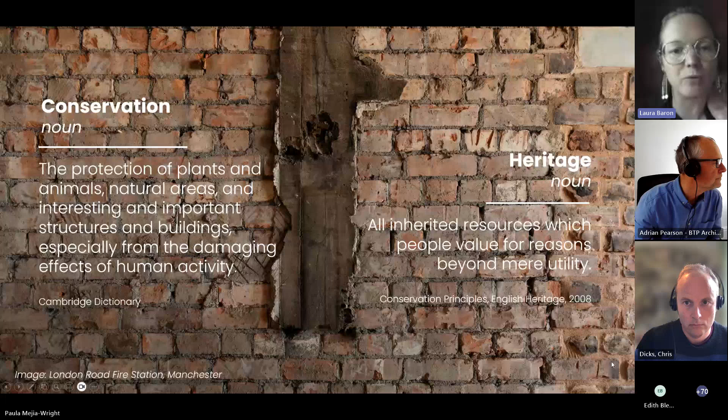So the term heritage is defined as all inherited resources which people value for reasons beyond mere utility. So we place values on our built heritage that go beyond cost per square metre, and we impose protections through listings and other restrictions because we value their historic and social significance. The conservation of our built heritage is sometimes seen as a barrier to change and progress, especially when we're talking about retrofitting energy efficiency measures.

But the definition of conservation is the protection of plants and animals, natural areas, and interesting and important structures and buildings, especially from the damaging effects of human activity. So conservation in all its forms is about the responsible stewardship of our inherited world, and with that it's intrinsically linked to supporting planetary health and conserving our natural resources.

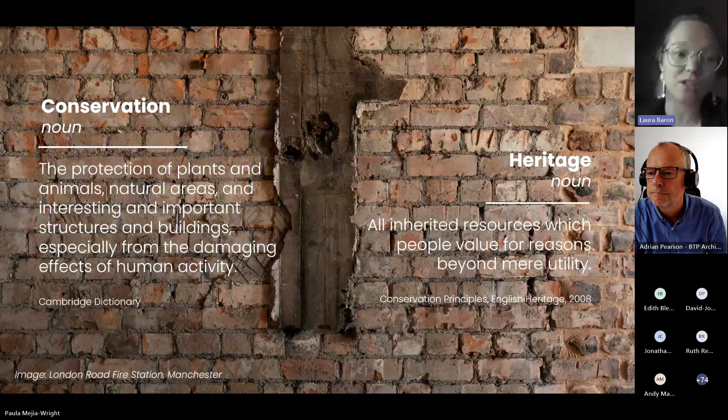But despite this inherent alignment, sorry about that. Something else was starting in the background. Is everybody muted? Just thanks.

We can't pretend that it's not without challenges. We of course need to be mindful of the sensitivities that come with listed and historic buildings, but that doesn't mean we can't be ambitious with our historic built environment, even radical sometimes.

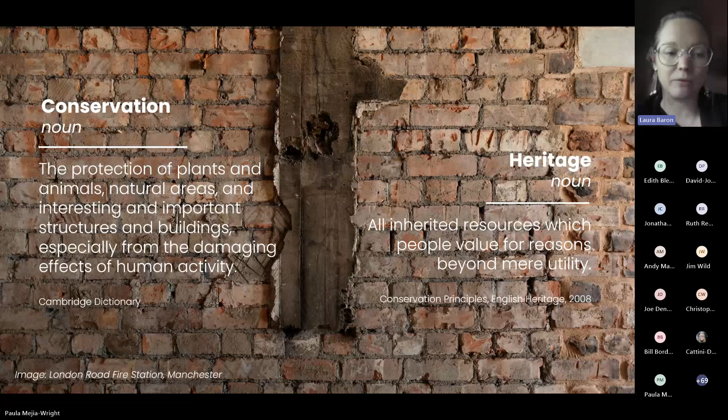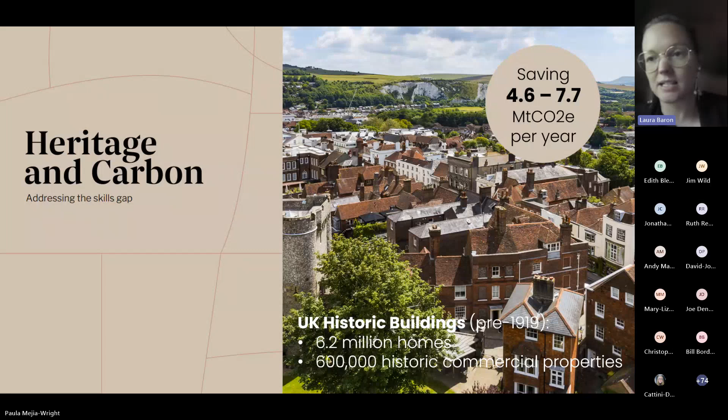Next slide, please. There's a report published in 2023 that highlighted the heritage and carbon skills gap and noted that nearly a quarter of all UK homes and a third of all commercial buildings were built before 1919. And that report estimates that retrofitting these buildings would equate to around 30% of the annual reductions in emissions needed to meet the sixth carbon budget. So doing nothing with our historic buildings is not an option, and doing something requires a collective effort and a shift in attitude. Next slide.

So retrofit is a word that we now all associate to mean buildings that are adapted to improve their energy efficiency with a view to reducing carbon emissions. In fabric terms, that's replacing windows, adding insulation, improving air tightness. But the problem with doing this in a building built before 1919, if you go back to the previous slide, sorry, Paula, is that these traditionally constructed buildings perform very differently to modern buildings, especially in relation to moisture and air movement.

They're made of vapor permeable materials which take up moisture from their surroundings and release it according to the environmental conditions. So drafty old buildings may not be very good at keeping in the heat, but this uncontrolled background ventilation helps reduce moisture accumulation. So when you apply layers of vapor impermeable materials like plastic-based insulations or cement renders and reduce that flow of ventilation too much, it can lead to problems of moisture accumulation and cause damage to the existing fabric, cause mold, and lead to poor indoor air quality.

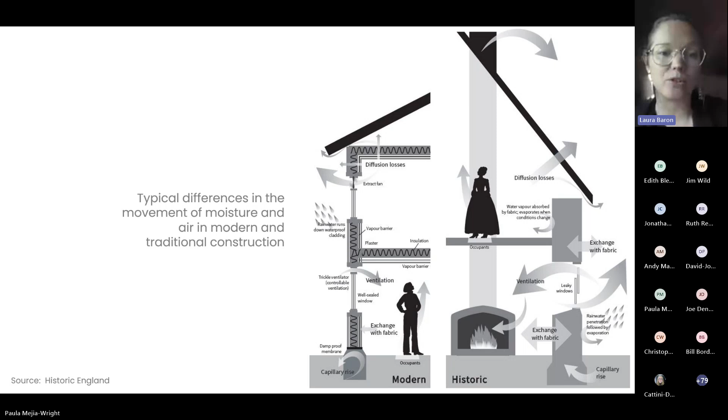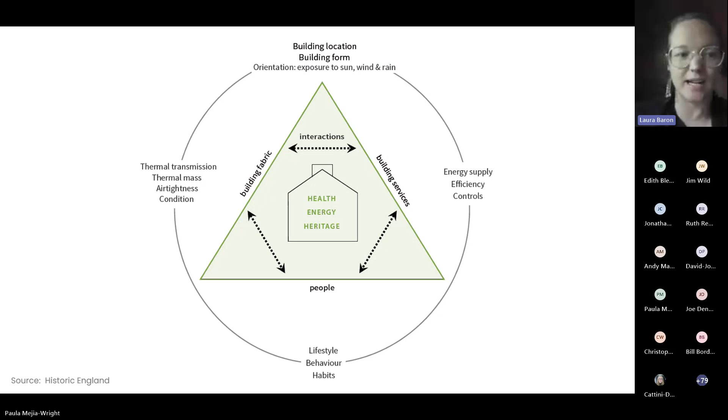It's important to understand how a building is functioning as an environmental system, and that understanding feeds into what is called a whole building approach, one which considers the building as a system of interconnected materials, functions and users, and understands the effect of external and contextual influences. This is the right approach to retrofit, regardless of the age of your building and whether or not it's listed.

At Purcell, we've been working with the City of London Corporation for over the last 2 years to help understand the barriers to action across the heritage buildings in the square mile. The square mile is home to over 600 listed buildings, which cover about 20% of their total land area. The City Corporation has ambitions to get to net zero by 2040 across the city, so they recognise that this isn't an area they can ignore.

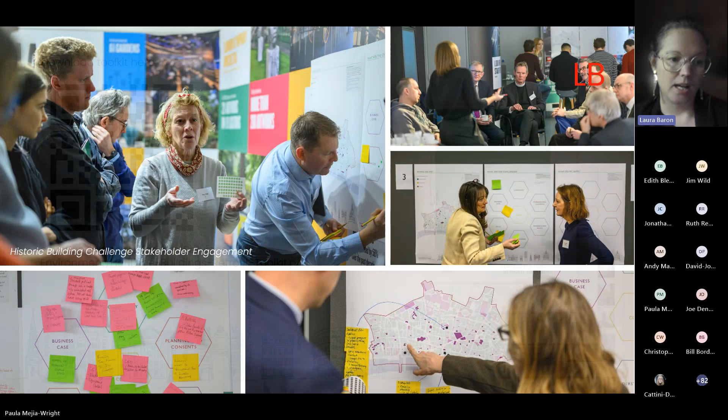We've carried out extensive stakeholder engagement with owners and occupiers of listed buildings to try and build a picture of what it is that is needed to help facilitate greater action in relation to carbon reduction across the built heritage. So in response to the feedback that we collected, we've produced a toolkit which is available to download as a PDF.

There is a QR code on the screen for those who want to take a look. If that's not working, you can just type Heritage Building Retrofit Toolkit into Google and hopefully it's the first thing that comes up. The goal of this was to provide easily accessible advice and guidance on where to start and to signpost other excellent resources on the topic.

The toolkit identifies 8 core typologies of historic and listed buildings common to the square mile, but with relevance outside of the city too. It acknowledges that there's no one-size-fits-all solution when it comes to heritage retrofit, but there is a common approach. We've set out a 9-step approach, which is based on best practice principles.

And this understanding helps to develop the options of how you can improve that, but also build a case for change in terms of significance.

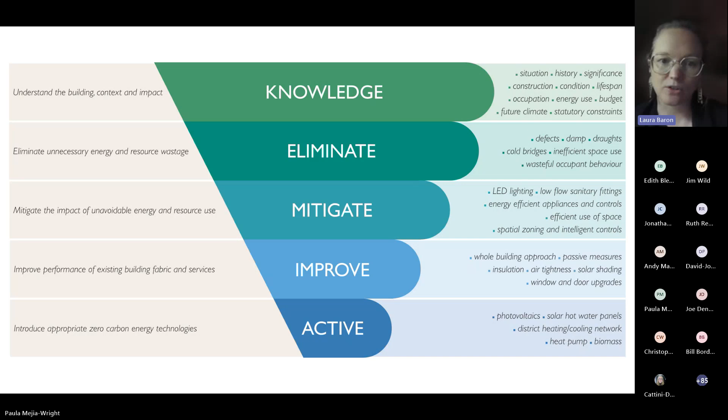This is very much an approach that we took at St John's College in Cambridge, which I'm now going to hand over to Paula to talk about in more detail.

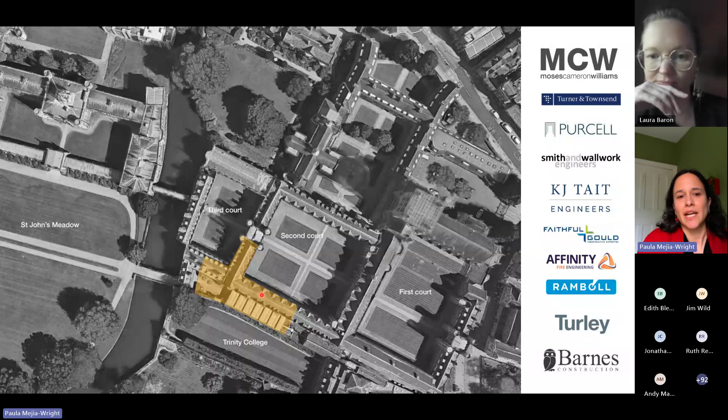So we have a corner of second court and also a section of third court, which was part of the site. We also have the Buttery Dining Room, the original one from the 1970s, which was built in an infill, which was the original kitchen lane where they kept all the stores. It also included a terrace. It's a very small terrace, but it's quite significant because it's the only outdoor space where people can sit in the college within the core, historic core of the campus.

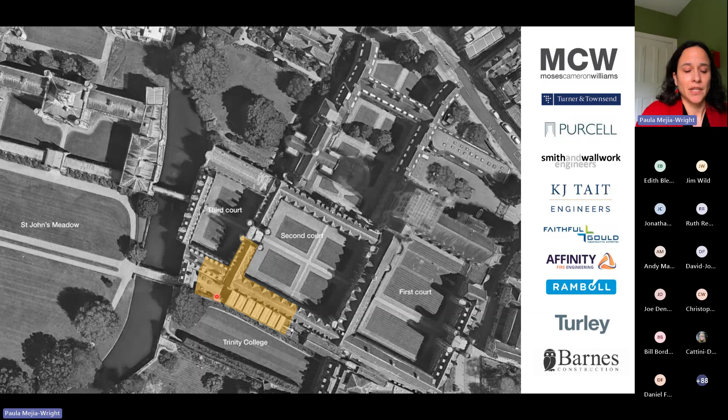This is just a picture of what the second court side looks like. So we are exactly here in the corner. And just a little bit about what it entails.

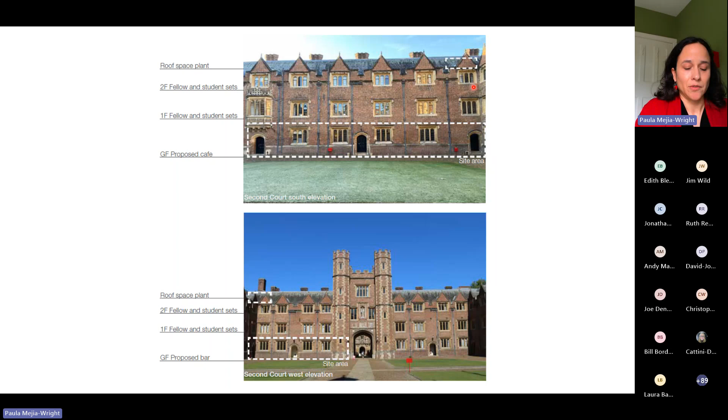The part of the listed building that we are going to talk about today was limited to the ground floor, but we also have some area in the roof where we're going to have all the plant, and Dan is going to tell you about it. We have to thread all the services from the roof to the ground floor through the listed fabric, so that's quite a tricky part of the project.

The original layout had 3 very distinctive spaces: the dining room, built in the 1970s, and a bar, which was a little bit dated but really well loved by students and the fellows. A section of the community felt it was not very inclusive - it was pretty much a sports bar with doors.

All 3 spaces had doors to the center hallway where the toilets were, and the JCR, the junior combination room, which was basically the undergraduates' social space. That space had an internal ramp which used to take most of the space in the plant. It was quite intrusive, and also for somebody to use that ramp they needed to call a porter to open the door, so it was not a very great condition.

The Buttery dining room, built in the 70s, was not insulated. It was cold, acoustics were poor, and it was very dense - a little bit like a school canteen. It needed some revamping, so that's part of what we were asked to do.

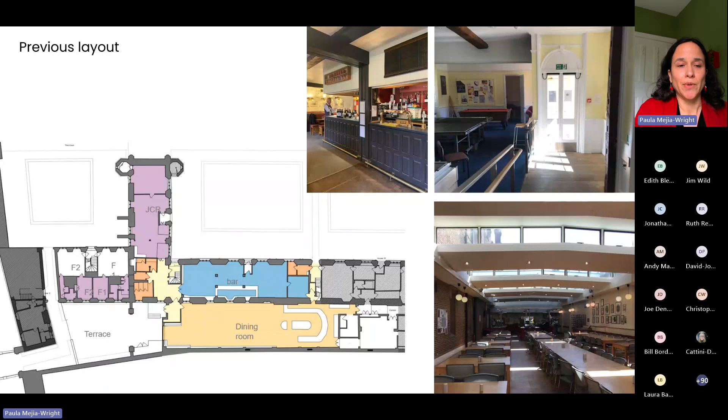For the proposed layout and the brief, the college asked us to create a space that was going to be the center of the community. This was the first project of the master plan - they had a master plan done by Allies and Morrison, I think in 2018, and this was the first project.

They needed to be more inclusive and accessible. We needed to increase the capacity of the Buttery as well, because they wanted to have at least 200 seats, and they only had just over 100. And it needed to be more sustainable, and we'll get to that.

In terms of inclusivity and accessibility, we raised the level of all of the JCR and created new levels on the outside, on the court, so we can access the community hub from level access from the court. We added a ramp, and we also raised the terrace, so basically we have a single level all throughout.

We moved the bar from this area to the JCR section and opened up what was originally windows - you can see one here in the corner. Original windows became doors, so we could connect both spaces, and that was our strategy to increase the capacity of the space, because there was no way we could really extend any more into the terrace of the original Buttery.

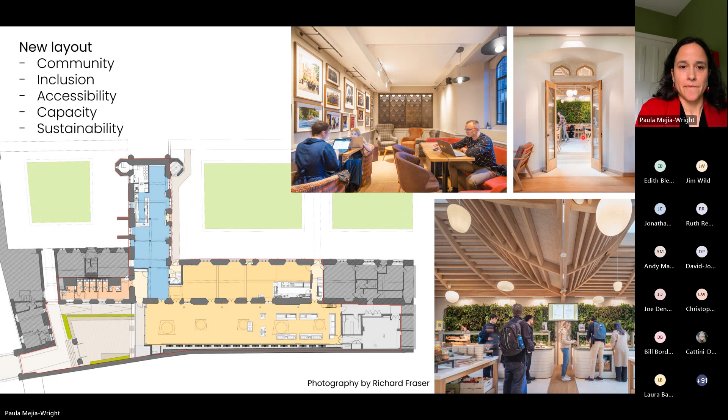Hopefully that gives a picture of the kind of level of intervention that was possible, and I think that was primarily because we'd built up quite a strong knowledge base and really understood the capacity for change.

Purcell were Heritage Architects, so we carried out a large amount of research, particularly into the historic development of the college, specifically this area - looking at archive records and historic drawings. There was opening up works and visual inspections carried out.

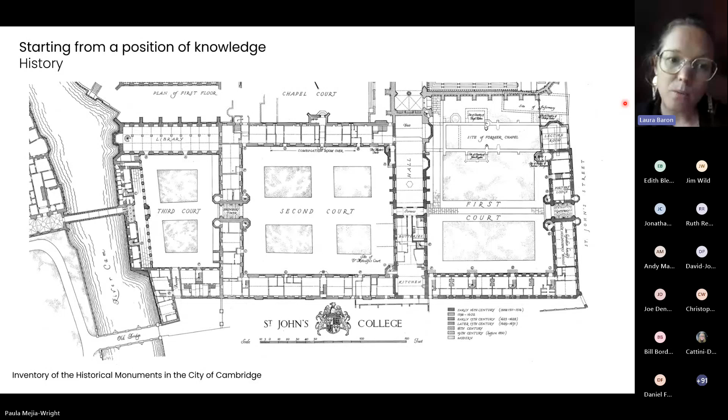Of particular note, there was a survey of the interior panelling that identified areas clearly historic, other areas that appeared historic but had been reused from somewhere else. It highlighted that quite a lot of the panelling was more modern, and this helped build a case for change and provide demonstrable evidence for what we decided to do as part of the retrofit of the heritage building, which was to insulate the inside face of the external walls. We're going to come on to that in more detail.

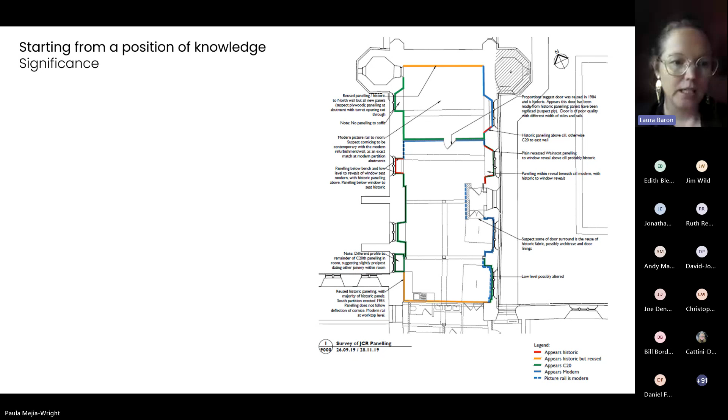So all of this information fed into an assessment of the significance of the building, which is graphically captured through this drawing, and there were other subsequent ones as well. It shows areas of high significance in orange and red, medium significance in yellow, like the ground floor slab area, and low significance in green and blue, like that 70s extension that Paula already mentioned.

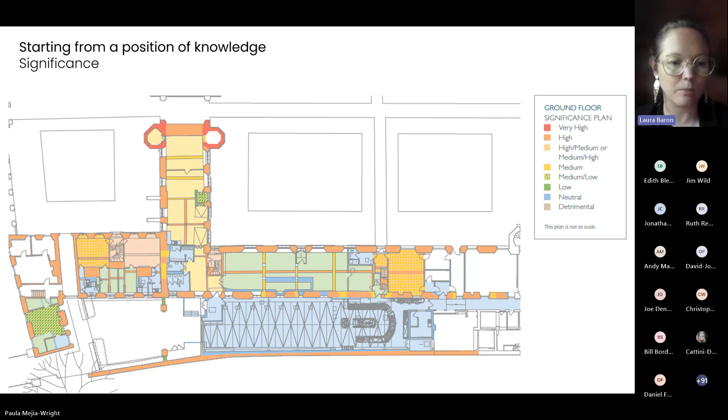So the study concluded that whilst the project is within a highly significant building, the area allocated for this renovation has undergone considerable change in terms of layout, use and built fabric. Like most listed buildings, the site has capacity for further change to meet contemporary requirements, including environmental improvements, provided that they don't adversely impact the most significant spaces.

So in addition to all of that collection of data around the significance, there was a lot of research to determine the building's performance, including condition survey and opening up works to verify the construction build-ups.

This image shows the thermal imaging survey that was done to understand where heat was escaping from the internal areas. The survey showed evidence of air leakage caused by openable elements of the windows and doors that do not form a complete airtight seal. You can see that through the different variations in colour there.

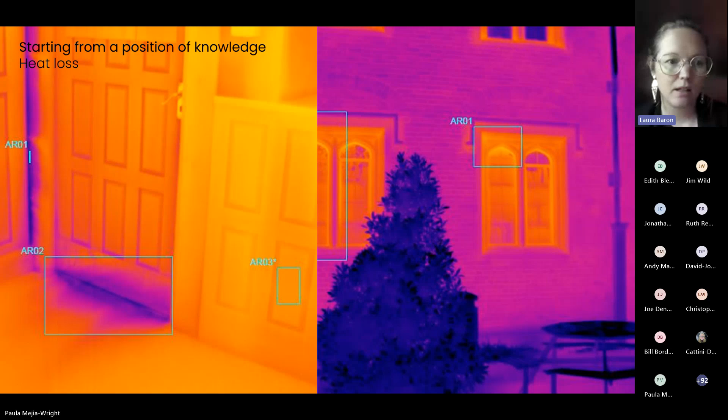And quite a prolonged period of monitoring of relative humidity, ambient temperature and surface temperature over a 12-month period before works commenced, and that was to review the possible environmental impact of the proposed changes on the conservation of the historic fabric and furnishings.

So there was a huge amount of baseline data and research that was built up, and that fed into the analysis that K J Tait carried out, which I'm going to hand over to Muhammad now, on the next slide. Before I pass on to Muhammad, I should have told you before that the reason why we did all this data...

So the surveys, the analysis of the historic fabric and all of these is because in terms of sustainability, the college didn't give us a very detailed brief. They just said they want the building to be as sustainable as possible. Initially, as a team, we only thought we could just think about decarbonisation. We didn't really think we could have any improvements to the fabric, being a grade 1 listed building.

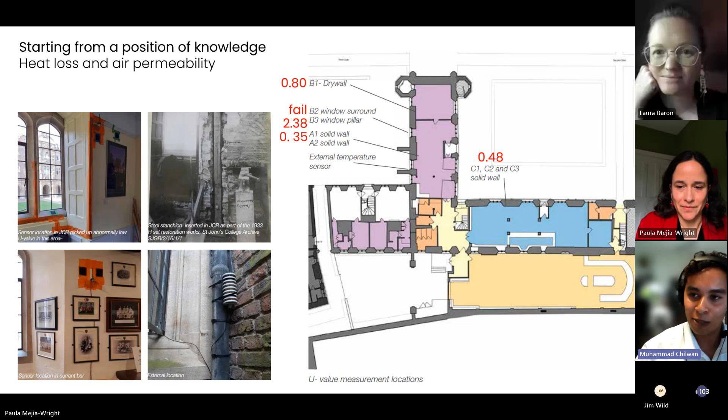So I'll pass on to Muhammad, so he's going to talk about the model. Thank you very much, both. So my name is Muhammad, I'm from K J Tait. I was working on the energy modelling and helping out on the BREEAM assessment for St John's.

So what we did is we gathered the information from the surveys, and with the use of the architectural plans and elevations, I managed to create a 3D model of the refurbished areas. And in this case, this is used as a base case to compare against any sort of proposed upgrades for the future.

The building elements assigned for the U-values were coming from the survey, but we also used assumed values as well, from other experience we have with other buildings and investigations. So if you see on the left, we've got the U-values that were assumed and from the surveys there.

It should be noted that these U-values are only indicative due to the historic nature of the building. The calculations used to determine current and future performance were developed for modern structures with known materials or predictable performance. Applying these tools to historic buildings can be done with a general understanding of current performance and anticipated change, but there are many variables which mean outcomes can differ from those calculated. Nevertheless, when used with understanding, the tools can still be helpful in defining the overall impact of changes.

For the model, we used a test reference year weather file to calculate weather conditions and provide the annual heating output, seen on the right-hand table. Using a daily profile between 9 AM and 10 PM and a set point of 21 degrees, a peak zone heating consumption and an annual heating energy consumption were calculated by the software.

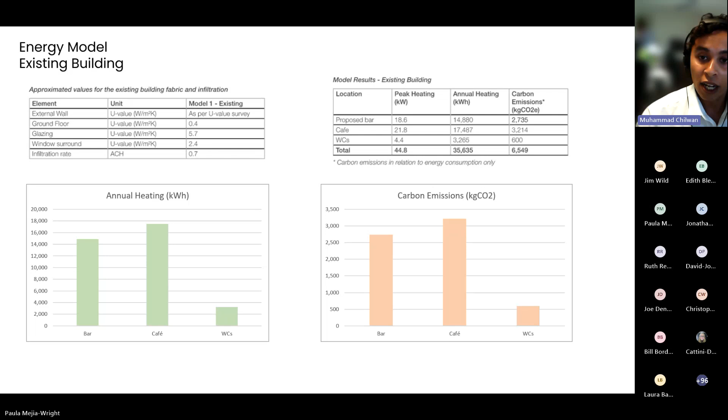We used quite a variety of different separate models to compare against a base case. Six options were created using the IES software to assess the potential reduction in annual heating loads, energy consumption, and associated carbon emissions.

As displayed in the table, we used different options, replacing the glazing to provide a better thermally insulated performing option. We also used options to insulate and improve the facade, with the aim of a better thermally insulating envelope, and even a combination of all separate variables.

As a team, we investigated as many feasible routes as possible to obtain the best course of action to provide the best reduction in terms of annual energy consumption.

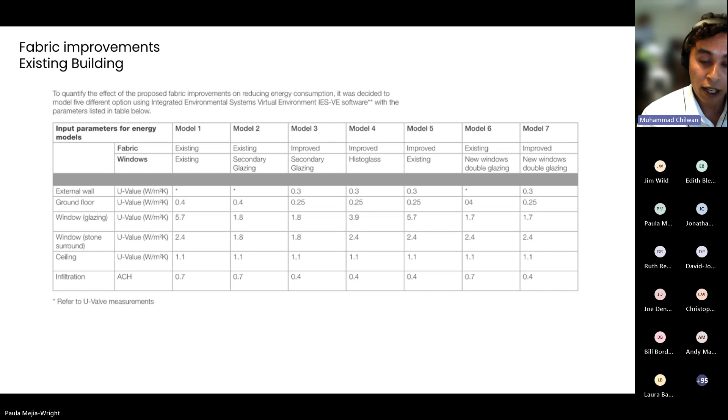Given the heritage of the building, there are limitations on how much can be altered and changed.

To further narrow down the best practical way of reducing energy demands, various glazing options were looked into. These can have thermally improving aspects, but there are also other considerations, like visual appearance and maintenance. Replacing a whole window system also has to be kept in line with aesthetics, so this was a parameter we looked into when choosing the best approach.

Secondary glazing was an option we looked into, which helped with the overall U-value of the glazing system, but created a negative impact on the view out and the daylighting, which in turn did not help with achieving certain BREEAM credits.

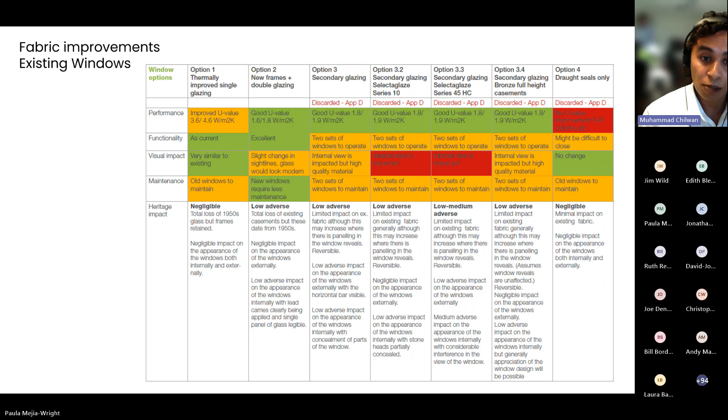This was closely followed by options 4 and 7. It was seen that the impact of window replacement was less than the improvement of the fabric, primarily due to the wall-to-glazing ratio.

Therefore, it was concluded that the best route forward was option 4, using fabric upgrades to the wall and floor, but also using Histoglass, a thermally improved single glazing pane system, which keeps in line with the period of the building.

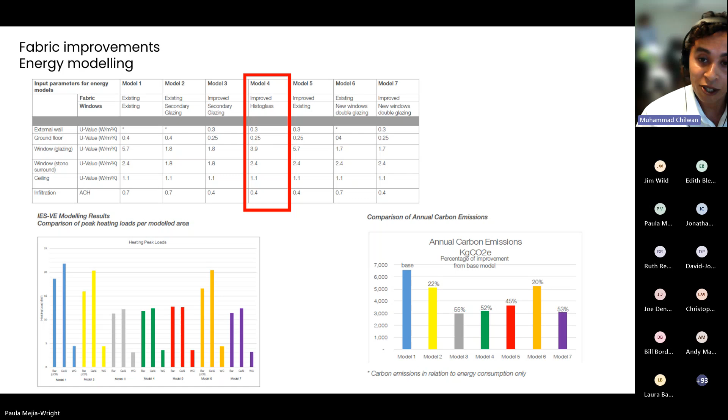Thanks, Muhammad. So I'm just going to highlight the improvements that we did.

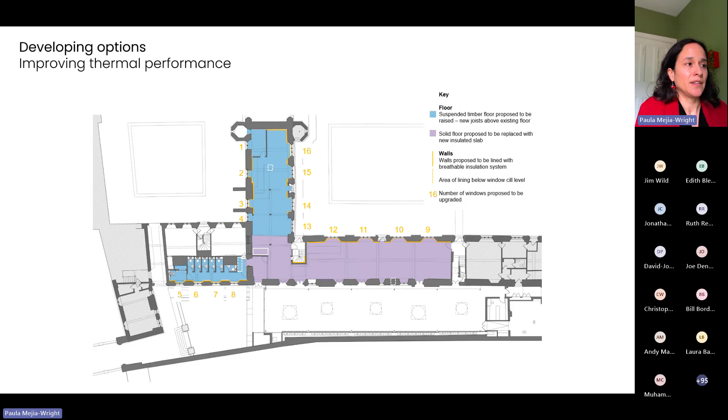Apart from the walls and floors, we also had to bring back - because we're changing the environment of the ground floor - we had to separate that by insulating the ceiling. We basically created a box in the ground floor, so we didn't want to affect the environment of the floors above. We have some precious wall paintings, wall frescoes just above, so it was critical that we didn't change the environment.

As I said earlier, we also had to bring ventilation - mechanical ventilation - to change what was the historic ventilation through leaky fabric. We needed to replace it with mechanical ventilation, from MVHRs in the roof, through risers, through the building, and distribution under the floor.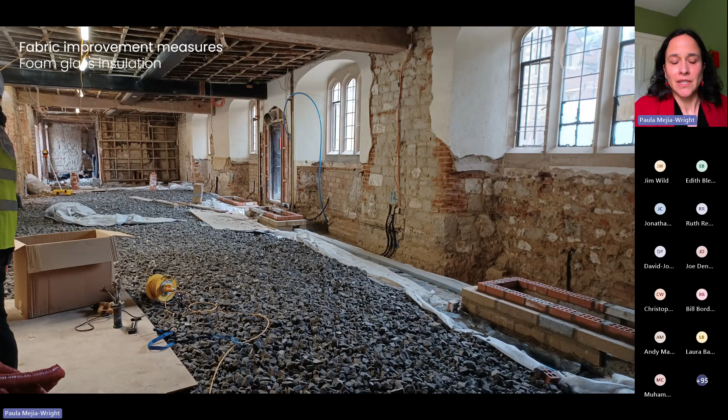Wood fiber, as I said, on all the external walls, and the windows were changed with Histoglass - it's called Mono RT Plus Histoglass. It's only for milled units, so it fits in the existing frames. The existing frames were bronze frames, which were repaired. The U value of the glass was improved to 3.6, which is not great, but it's much better than the single glazing that was between 5.6 and 5.8.

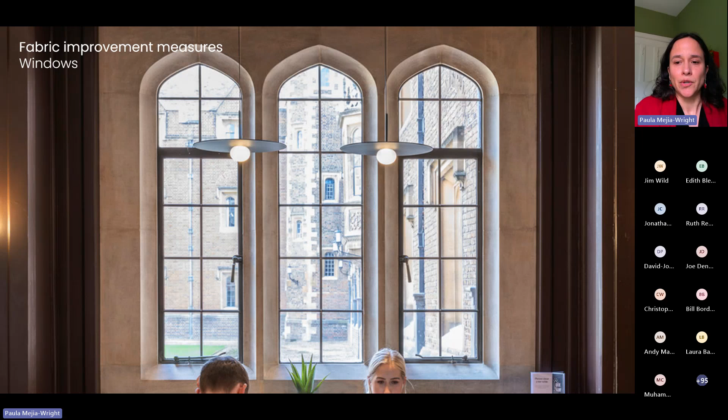So I'll pass it on to Laura, I believe.

Hi, yes, I was just going to note with this slide, one of the benefits of the heritage approach to retrofit - some of the products mentioned are bio-based products like wood fiber insulation, and that contributes to lowering the embodied carbon overall of the project, so it's something we're cognizant of, as well as the operational carbon. That's what I wanted to say on this slide, and I think Dan's now going to take us through the services strategy.

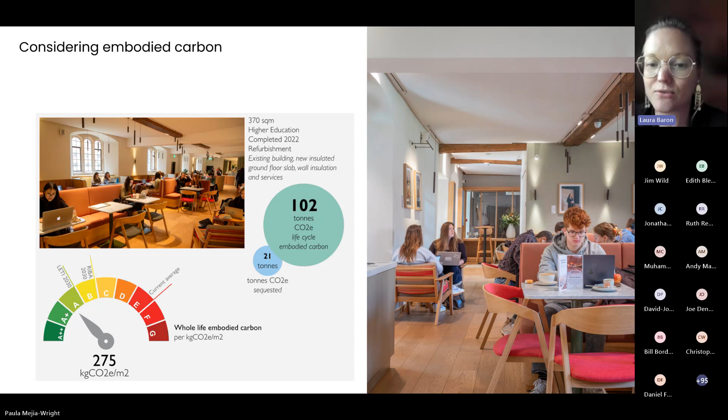Hi Laura, thank you. So I'm Dan Farrington, I was the MEP lead on the project right the way through. From our perspective, the services strategy had some fundamental key principles in the design. With it being a historic building, we wanted to keep the services hidden from sight throughout both the listed and the new build elements. We wanted an exemplar low energy building, which has been covered through the modelling that Mohammed took you through, and also we wanted an integrated design approach - services, structures and architecture working together to give us a warm, welcoming and comfortable space within the new area.

Within the Buttery dining, shown here, the strategy was really for displacement ventilation, which came in through low velocity grills at ground level, as shown in the image here. During the winter, these would work with an extract fan at high level above the servery area, so we would pull air out, avoiding the smell permeating further into the building and the adjacent spaces.

In the summer, we had a mixed mode approach, so effectively we could utilise the big roof lights that could open up and allow us to purge and ventilate any hot air using a kind of stratification approach.

We could also open these overnight to offer some night cooling, where we would cool down the existing structure of the building and also the new floor slabs. We use underfloor heating throughout the whole building, where basically we could provide radiant heating to occupants. This worked well with the heat pump system that we came up with to give us a low carbon footprint.

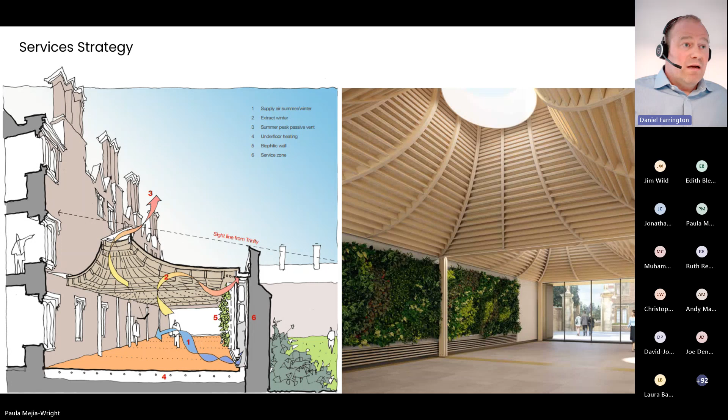For future climate, we also put in some infrastructure for cooling pipework to add cooling batteries at a later date, should they be required, to give us a bit of climate mitigation. There was also a rainwater harvesting strategy from the existing roof, which was collected and then used to fill the biophilic wall that's shown here in the image. Next slide, please.

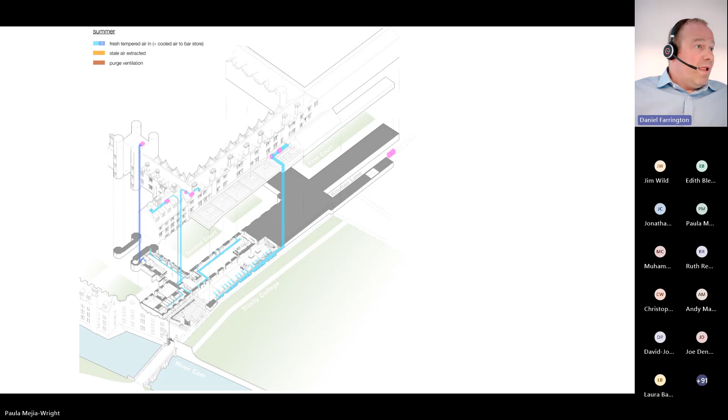So this one really takes us through the wider strategy in the building for the ventilation. As Paula mentioned, we've got an MVHR that's serving some of the WC blocks that are being newly created, and an AHU with a thermal wheel that was used to serve the cafe and the bar areas. The only area that had any cooling was the bar cellar, which is shown in the dark blue, which was really just to give us a much cooler space to store all the drinks.

If we purge through these, then Paula, if you can go on the next one. That's it. So the extract, again, was taken at the point in the cafe and in the bar, to take the smells away. To keep the services hidden, one of the chimneys was repurposed to run a duct from the cafe up to the roof level, and then it ran through the roof void back to the main air handling plant. We had a common return arrangement to the open plan between the cafe and the bar area.

And then also we had purge ventilation, go to the next one. That's it, brilliant. We've obviously got the existing windows and the turrets within the new build area, so these could be utilised by people sitting in the spaces as and when they felt necessary. For the winter situation, it's a fairly similar setup, full mechanical ventilation throughout, bringing the air into the building and taking it out again. So next one. Brilliant. So a very similar setup.

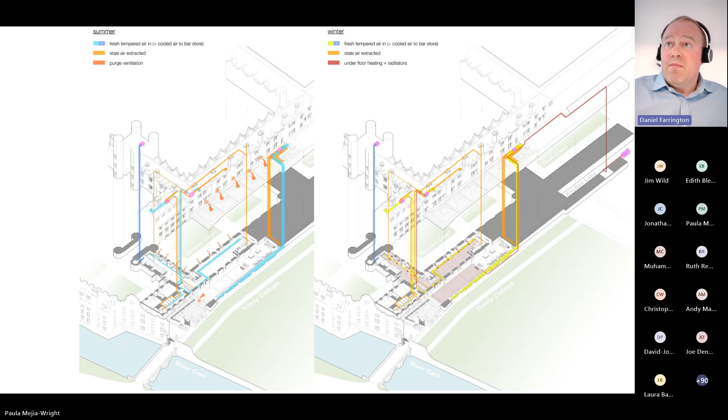Obviously, this time we don't have the purge ventilation, but we have the addition of the heat source, which I think you can see there is labelled as kitchen lane. If we do the next one, which provided all the heating to the building, so underfloor throughout. We also had some radiators, which I'll talk a bit more about in a minute. Next slide, please.

So low and zero carbon measures. I think Paula mentioned earlier we had a few options open to us. The first one we looked into was making use of St John's Meadow in the adjacent space. The white square here shows the kind of area we might have needed to feed the building's heating supply. However, we looked at whether we could then expand this further to do the heating to the rest of the buildings across the site.

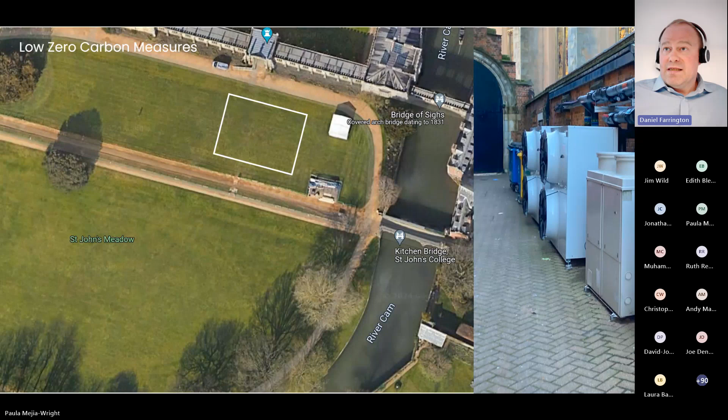The second option was to look at the river. You can either do an open or a closed loop system. We looked at both possibilities. Both were fraught with fairly tricky technical problems. The river Cam's fairly shallow. It's a popular spot for punting, so that in itself brings about several challenges that would also add complexity to the project. Then the chosen method we ended up going with in the end was air source heat pumps. So as we said, these were down the kitchen lane, and they're shown here on the right, where a precedent had already been set for heat pumps to sit. Next slide, please.

So yes, as I mentioned earlier, we had some radiators. Under the existing windows, those that had the Histoglass added, we were still concerned about potential drafts that were created from this much poorer performing fabric with a big cold stone. So in winter, you might get a downdraft coming onto the occupants. So to offset this, we did hidden heat emitters that were put into these boxed out recesses that were located behind the seating areas.

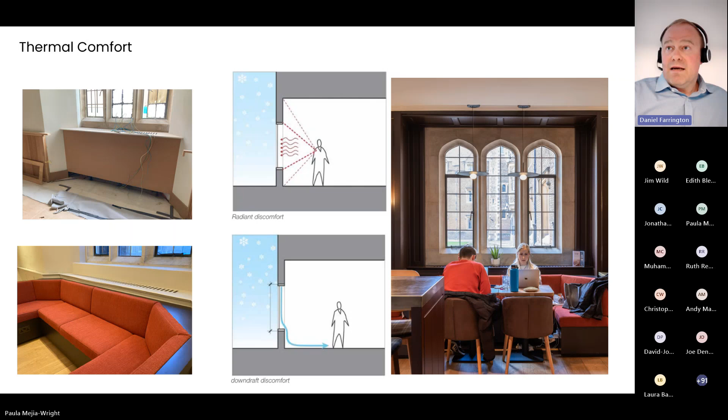These had a remote TRV that basically measured the air temperature around head height of the people shown here, and would allow these to come on and off as required during colder periods of the year to give us a warm air curtain to keep the space nice and comfortable. Next one, please.

So we talked a bit about risers through the building. Obviously, previously there was very limited service distribution. Now what we had to do is get sufficient air in to look after all of the occupants. So carefully, we threaded up a whole new riser from the ground floor up through the bedrooms, which had to be carefully considered. It sat directly behind the panelling, shown here in the middle and the upper image, such that the maintenance could be completed from below and above, and there was no disruption to the fabric on the intermediate floors.

And again, for future access, if these were occupied spaces, it would make things a lot easier. I guess the other challenge was the riser needed to be completely fire rated to maintain the compartments between the floors, and it also needs to be able to remain self-standing in the event of a fire on any level. So that was quite a big challenge.

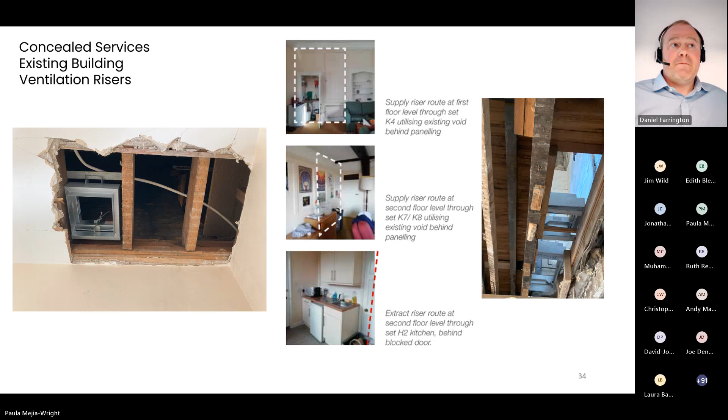Once we got the air down into the spaces, we had to think about how we could distribute it into the rooms with minimal intervention to the aesthetics of the building. As Paula mentioned, this involves some fairly significant excavations to some of the areas here. You can see a trench on the left where we literally dug up the floor to run the vent around the perimeter of the building. And then where there were suspended floors, we simply ran the services underneath.

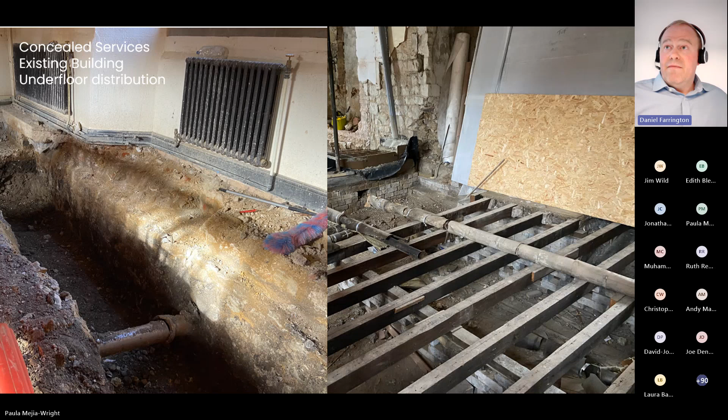We did this for all primary services, so the power, the water connections, and all of the chilled and heating pipework, which then popped up into various other areas. Great, thanks, Paula.

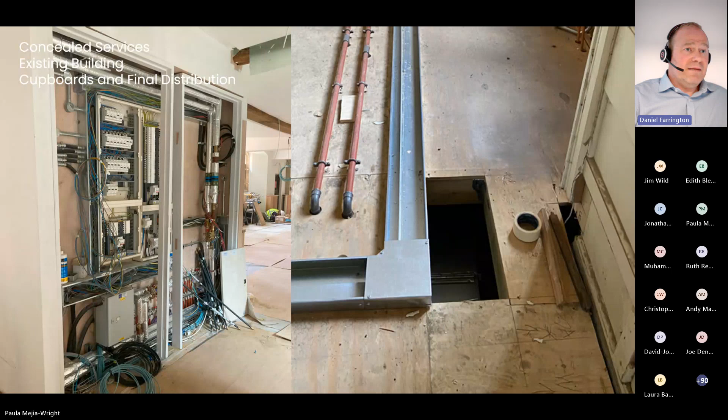The cupboards and final distribution here, so you can see we've got somewhere to accommodate all of the new electric panels and underfloor heating manifolds. These were discreetly integrated into the layout of the spaces. Then we also had a final level of services. On the top layer here, you can see some of the pipework and the trunking, running floor boxes and power going across, which sat within the insulation level before the final floor finishes were put on top.

And so the finished effect was this. A wooden floor went down. You can see in the central picture there were these rather large rectangular boxes which contained a linear diffuser which would discreetly put the air into the space, but at quite a high velocity to get the air volumes in. And these had to be very carefully coordinated with all of the furniture layouts to make sure that they remained clear of obstruction at all times. But this gave us a fairly minimal visual impact for the vent.

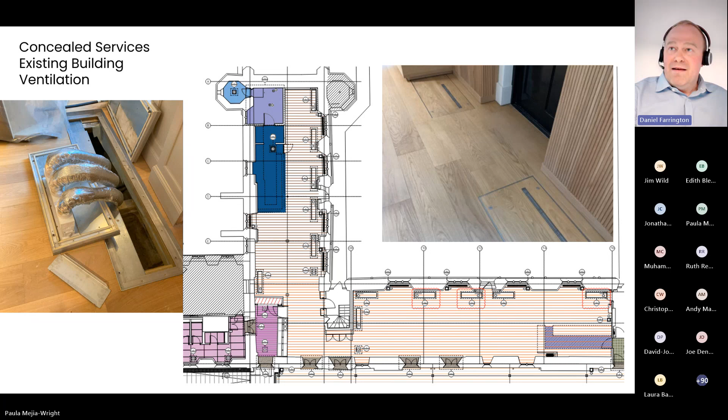For the new build element, it was a bit easier here. We had a service path down the wall of the existing building where we brought in all of the power, the rainwater was collected, the heating pipes and all of the ductwork, and that sat behind the biophilic wall here, which allowed the services to come into the space without being seen.

Underfloor heating was used again. The buttery had a lot of chilled counters that needed refrigerant pipework, and they were located in the middle of the spaces. So we had various channels between the sections of underfloor heating to allow the distribution of these across the floor plate.

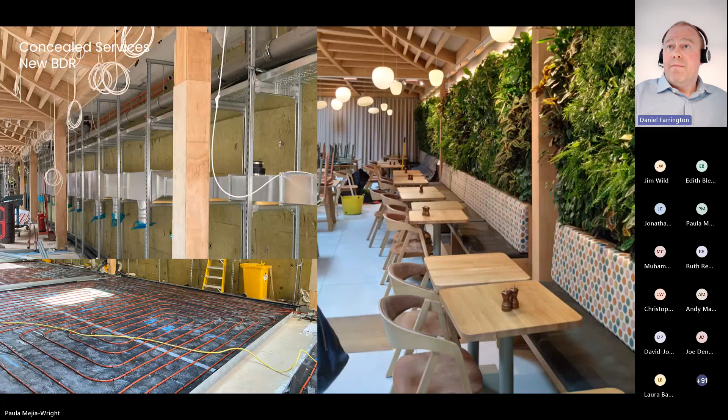And then the plant was always a tricky one to accommodate in any historic building. We often find that roof spaces are a great place to look at, although they still present their challenges. Often they're empty and they offer a good opportunity. As was the case here, we managed to locate both the AHU and the MVHRs in the loft. This wasn't without any intrusion. We did need to put in a new larger loft hatch to give us full access to both get the plant up and give future maintenance access, and also the areas needed to be fully boarded out.

But here you can see the kind of gymnastics we had to do with some of the structure to support one of the AHUs. And then in the middle section, you can see some of the ventilation that had come back from the chimney.

On the buttery diner area, there was an area of the roof that was set back, so it was out of line of sight from the adjacent bowling lawn at Trinity, with precedent already set for plant there from the kitchens. We managed to tuck them away, and then these were fully screened off, such that they had as little impact as possible on the surrounding building.

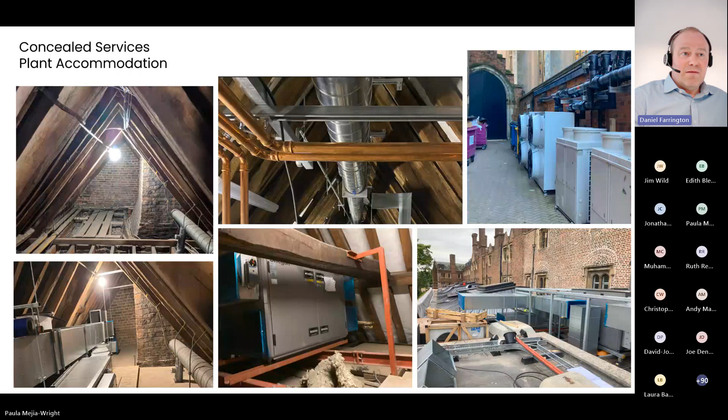And that's it for me. Thanks. Any questions? Thanks, everyone. Edith, I think we've covered everything we were planning on covering, so we can open up the floor to questions now.

Great. Well, thank you all. I think you've given us a really wonderful multidisciplinary presentation that touches on all the key aspects and really shows the attention to detail and the coordination and all of these things that are needed to make one of these projects successful. So there are a few questions now beginning to arrive in the chat.

So first one from Hannah Jones, Green Gauge. How were the requirements of BREEAM and consideration of moisture and thermal bridging balanced when looking at fabric strategy? How did you quantify the impacts of thermal bridging in your model? I assume only IES was used. How did you assess the risks of thermal bridging and moisture risk in your decision-making of fabric improvements? How much wall insulation and where this went?

Moisture and thermal bridging can create considerable risks with respect to historic buildings. Did you work with Historic England to justify your material decisions? What evidence did you have to provide? So that's a very long and detailed question from Hannah Jones. So I don't know who would like to start first. Mohammed, is it you're going to talk about the thermal bridging?